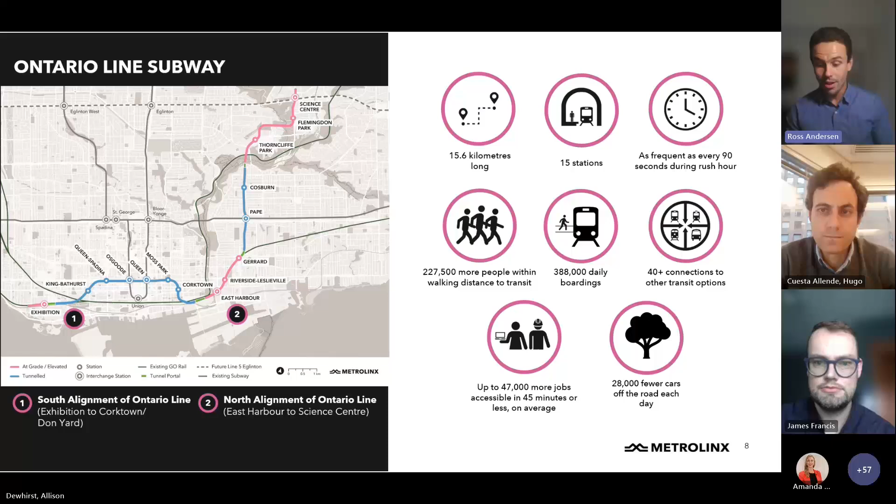Who is building the Ontario Line? Ontario Transit Group, or OTG as you might hear us refer to them, is a joint venture between Ferrovial Construction and Vinci Construction. They're procured to deliver the southern portion of the Ontario Line project, sometimes referred to as the South Civils. OTG will be responsible for building and designing the stations for the Ontario Line, and building the tunnels as well in the southern alignment. You can see here in the highlighted yellow area between Exhibition and Corktown, this is where OTG will be working.

The Ontario Line is going to be divvied up into many different contracts. Not only will there be OTG, but there are several others depending on where you are on the Ontario Line. There will be a contract for the bridges, another for the Don Yard, and so on. For OTG specifically, there will be one above-ground station integrated with the GO Transit Exhibition station, 4 new underground stations, and 2 underground stations integrated with the TTC network, at Osgoode and Queen.

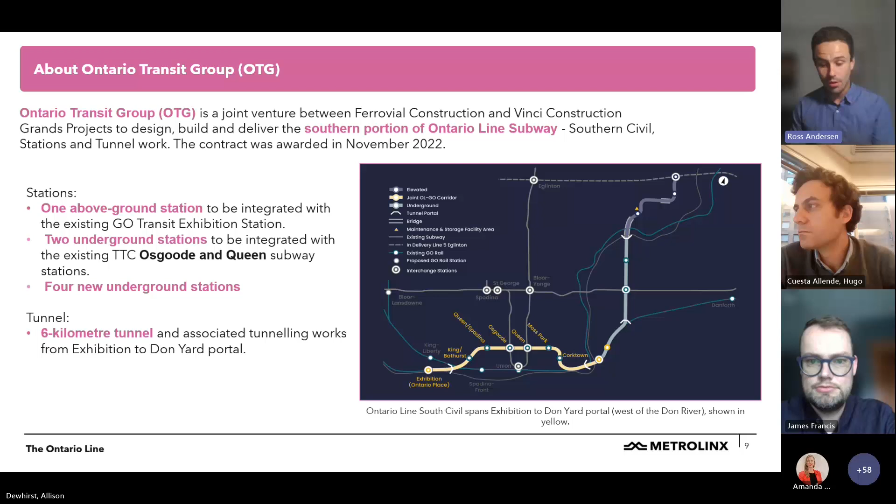The Ontario Line Queen Station is one of the 7 stations that Ontario Transit Group is working to deliver. Queen Station is anticipated to be one of the busiest stations on the Ontario Line, and it will integrate with the existing TTC Line 1 Queen Station. It will make use of the existing entrances with some modifications, including the entrance on the southwest corner of Yonge and Queen, where we'll be adding a wider staircase and an elevator to accommodate anticipated passenger volumes.

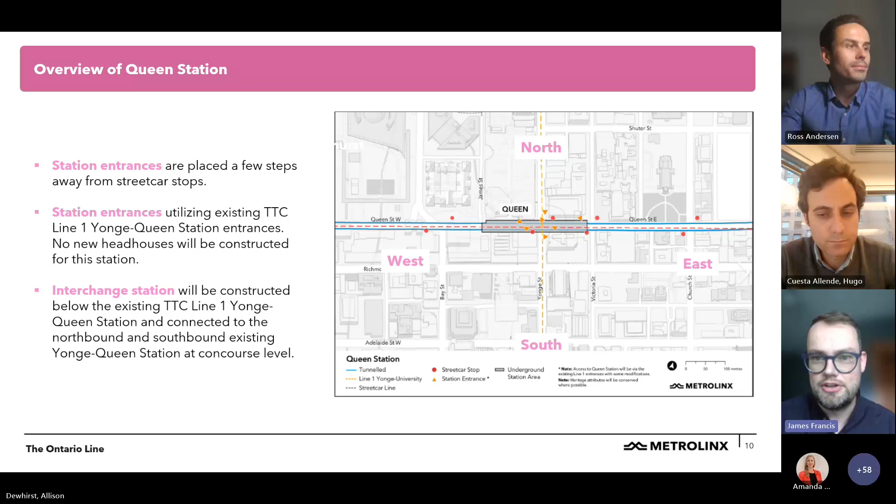Queen Station for the Ontario Line will be below the existing TTC Line 1 Queen Station, connecting with that station at concourse level, and extending underground west to James Street and east to Victoria Street, as shown in the black outline on the image on this slide.

We've been making great progress preparing the station area for piling. Over the past year, we've worked with utility providers to relocate a whole host of utilities, including water mains, storm sewers, combined sewers, telecommunications utilities, and natural gas infrastructure out of the Ontario Line station area, so we have a clear zone for construction, piling, excavation, and station construction.

We've also been working to modify the basement of the adjacent Hudson's Bay building to remove a conflict between that basement, which used to extend under Queen Street, and the future Ontario Line Queen Street station. We're now ready to proceed with our next phases of construction, including piling. With that, I'd like to turn it over to my colleague Hugo for the next slide.

I'm going to give a quick overview of the construction activities planned throughout 2024. OTG has just mobilized on the west part of Queen at the start of April, and a few days ago we mobilized into the east part of Queen between Yonge and Victoria. We are busy with enabling activities like fencing installation and surface preparation so we can start piling activities as soon as possible.

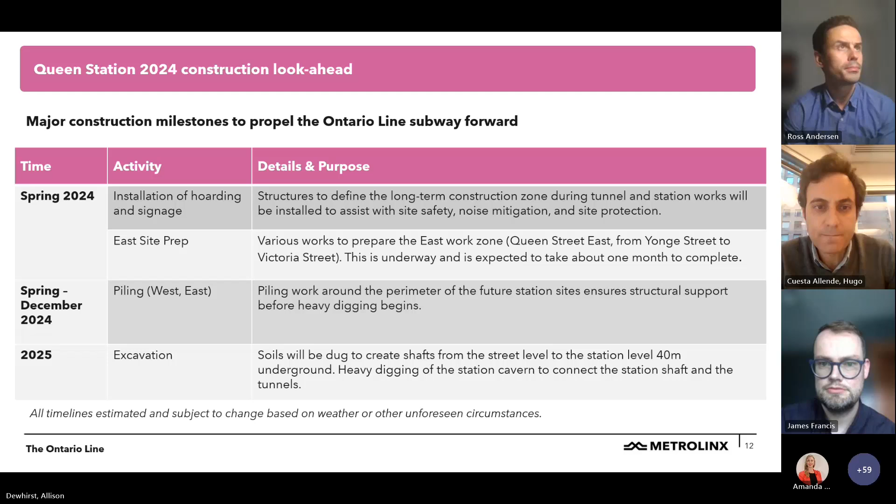Let's focus on drilling and how piling works. Piling is a foundation technique used to construct underground structural support systems. Basically, we are going to build a concrete wall underground that will allow us to create the excavation of the shafts. The piles ensure the stability and support of surrounding infrastructure, including buildings, utilities, and other services, allowing us to reach the bottom of the shafts while maintaining the integrity of the infrastructure surrounding the future station.

So the technique that has been chosen in the design of Queen Station is a secant pile wall.

Each pile will overlap the adjacent piles and create a wall, a concrete structure that will provide an adequate level of water tightness to proceed with follow-on construction activities after the excavation is finished. Some of these piles are reinforced with steel beams that provide stiffness to the wall, and all of this is required in advance of the start of any excavation.

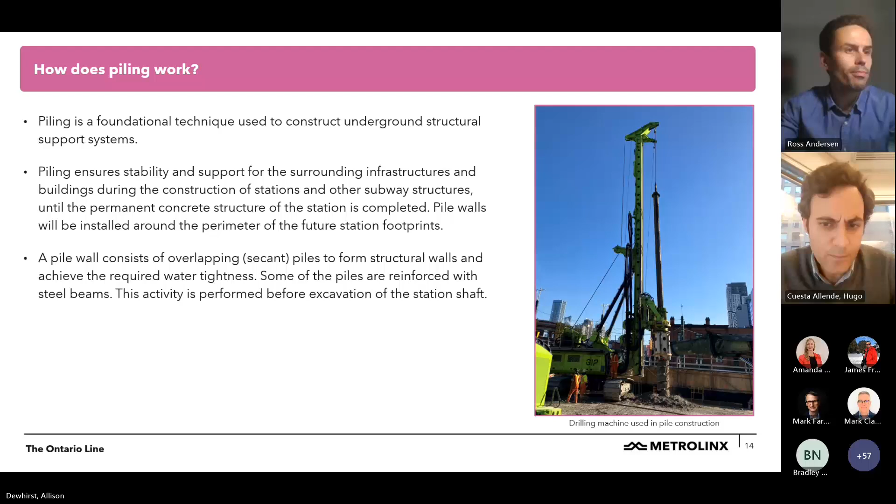To install the piles, we need a piling rig. The piles in Queen are around 18 meters deep, which is the distance from the surface level of the street up to the rock bed. They are all 1 meter in diameter, and they follow the perimeter of both shafts, the one on the west and the one on the east. The west shaft is around 75 meters long, and the one on the east is around 55.

This secant pile wall has primary piles, also called filler piles, and secondary piles, also called reinforced piles. The filler piles are not reinforced, and they are the piles that are overlapped by the secondary piles, which have the reinforcement. In this case it's not a reinforcement cage, it's a steel beam.

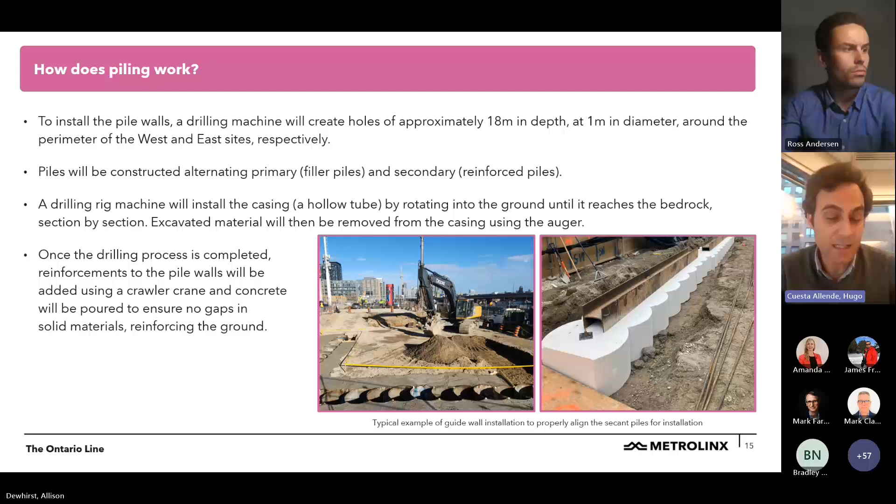To ensure the required tolerances are achieved, in advance of the start of piling we will construct a guide wall, which you can see in the picture on the bottom right. This setup allows the guide wall to be constructed, ensuring the piles are located in the right location with the right accuracy, and that the required verticality of the piles is achieved.

In terms of schedule, we are planning to start towards the end of this month, the start of June, and the piling will take place throughout the rest of the year up to December. We will primarily conduct these activities on day shift between 7 a.m. and 7 p.m., although certain logistic requirements will require moving some activities to nights, mainly to accommodate pinch points around the sidewalks in order to minimize disruption to traffic and pedestrians around the station.

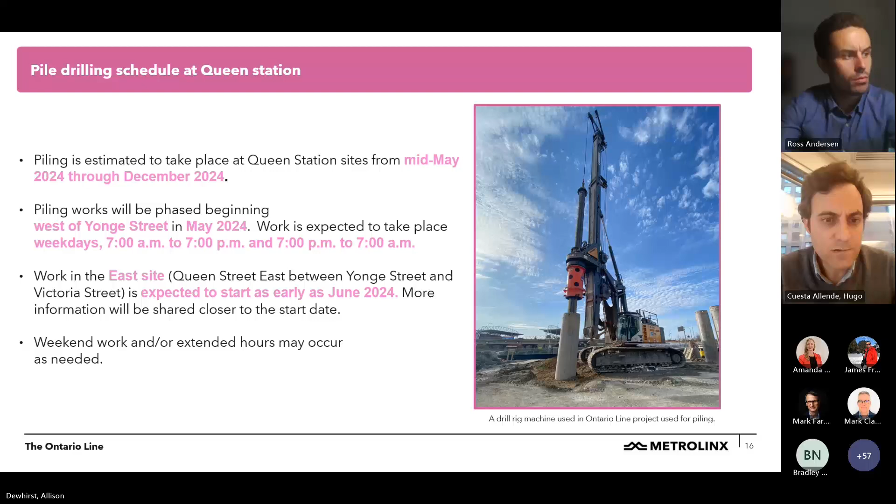Following on from before, once the piles are finished we will build a capping beam, a concrete beam that joins all the piles together. Then we will proceed with the excavation, and something similar to what you see on screen will be observed in Queen. The only thing is that it will be much deeper — we will reach 40 meters in depth.

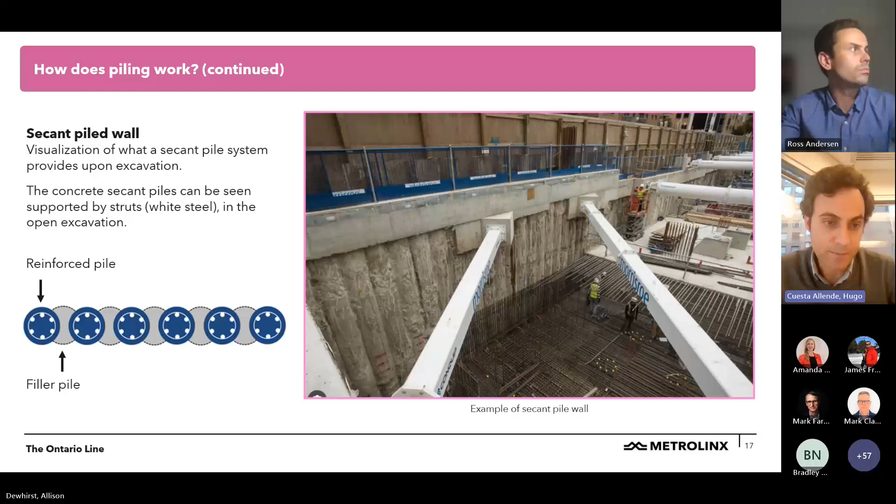As we progress with the excavation, at certain levels defined by our structural assessment we will have to install struts, which are these white steel beams you can see on the screen.

In terms of equipment, we are going to have piling rigs, loaders and trucks to take away the excavated material, concrete trucks delivering the concrete, and trucks delivering the steel beams along with cranes to offload them.

These trucks will enter and leave the site several times a day, following a specified route defined to minimize impact on local traffic. At each entrance we will have designated flag persons to manage the interface between pedestrians and vehicles and control safety, and at the main junctions at Bay, Yonge, and Victoria we will have paid duty officers as well.

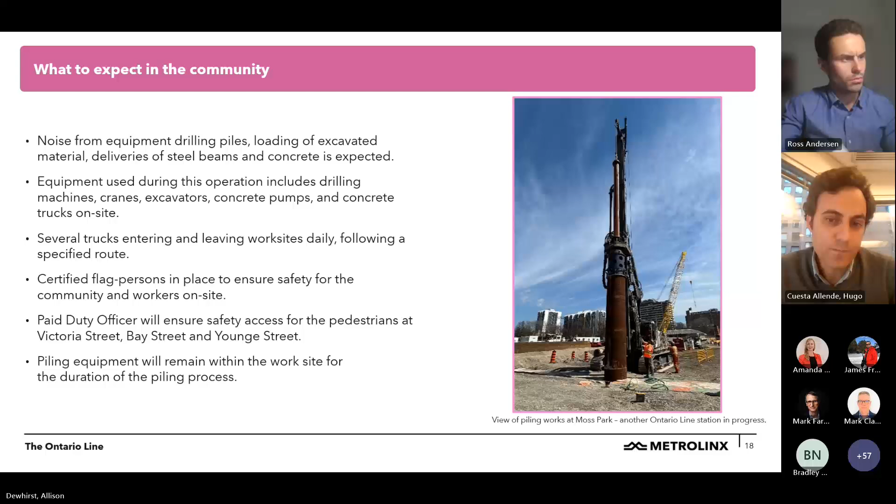James Street will also be closed between Queen Street West and Albert Street, and the southbound curb lane of Victoria Street will be partially closed to allow vehicles to enter the east shaft from Victoria.

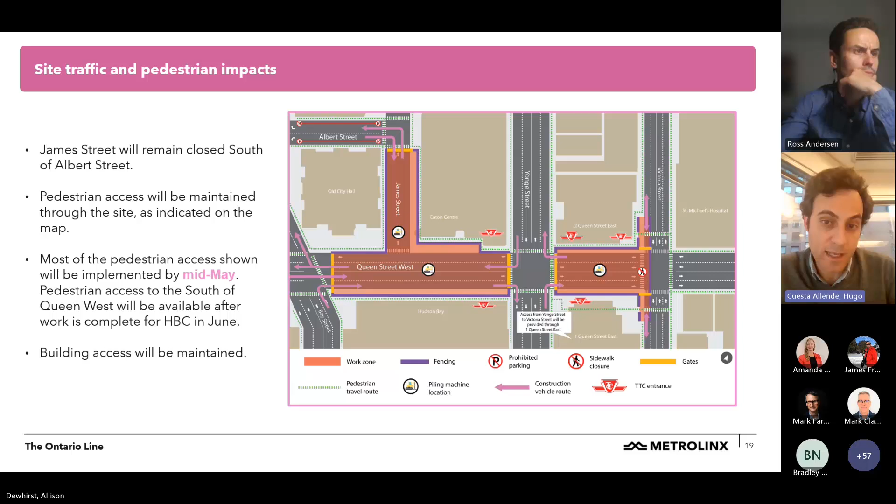Good evening, it's Aga Szczotka, Environmental Manager for OTG. I'm here to talk about how we are going to reduce those impacts on you as the community.

So we've got air quality monitoring in place to track dust from construction activities, it's live monitoring, so we know through this monitoring how well we are performing.

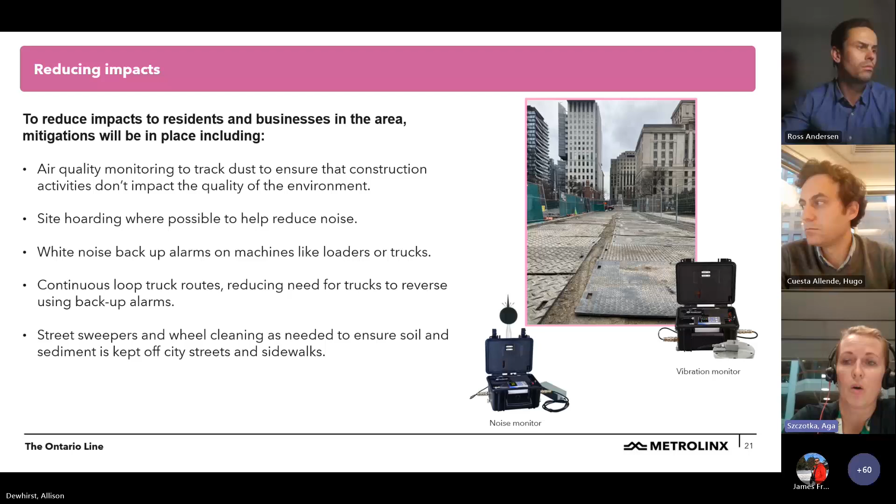We have also, wherever possible, site hoarding in place to reduce noise. We also use white noise backup alarms in machinery like loaders and trucks. We also, whenever possible, install a one-way system to reduce the need for trucks to reverse and use those backup alarms. And we also provide street sweepers when the roads need cleaning to reduce soil tracking on Toronto roads and streets.